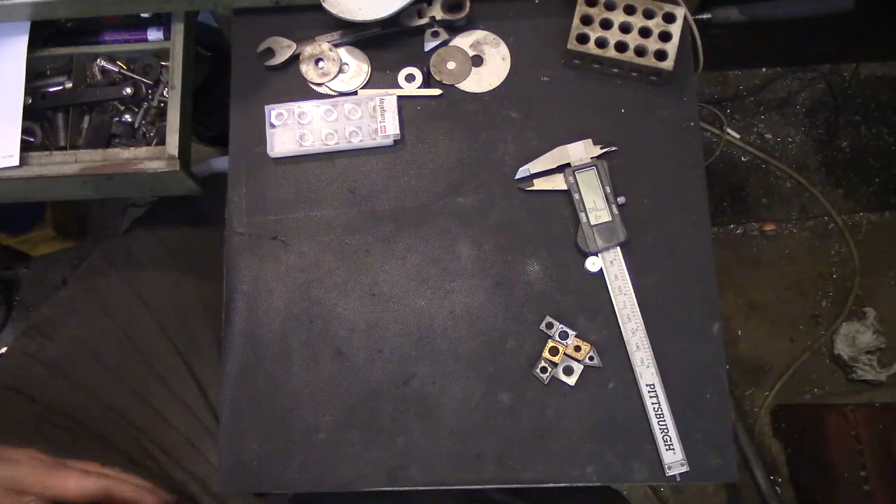And for this little quick episode, well, maybe it is going to be quick, maybe not, I want to talk about carbide insert tooling. Now, there is a big raging debate, or actually probably a lot of confusion. Do I, should I, can I run carbide insert tooling or any insert tooling with my small lathe?

Now, I'm addressing all you small machine owners like myself. Even though it's a larger bench top, it's pretty much a bench top machine. While it's not the smallest of the classes, there are probably a couple of X2 minis that are actually a little smaller than mine. Mine shares many of the same traits, meaning rigidity.

In machining, it's all about rigidity and precision. And you really can't have one without the other, because we're shaping metal, and metal fights back. So you need to have a little mass in the ass to take up the shocks and to force your way into the metal to shape it the way you want it. Anyway, for people with my class and lower of machine, should we use carbide tooling?

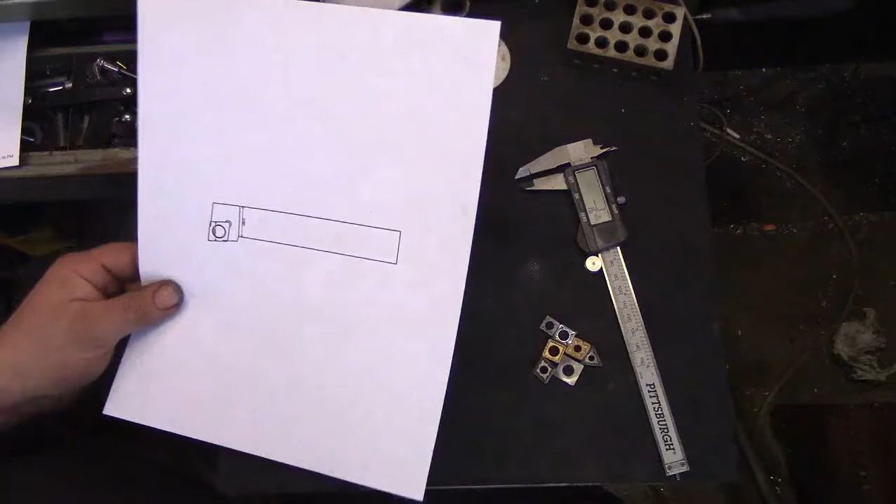So let's look at some of it, because my project today started out to be making a tool holder like this. And that's just setting the stage. We'll get back to that in a second. But let's look a little bit at some carbide. I'm going to zoom in to the desktop there.

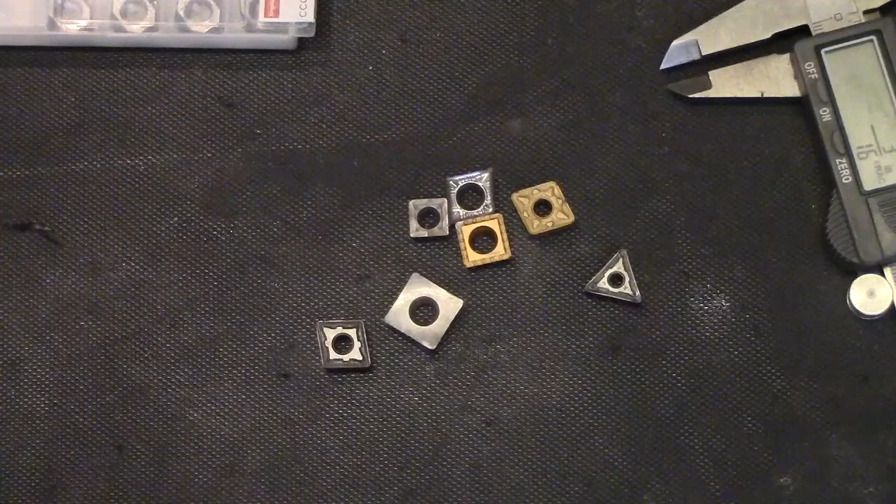Okay, now we're going to look at some pieces of the carbide and what you should look for, because chances are, if you've used carbide tooling before, it was probably given to you by a friend, or you just picked some up at random, not realizing there is a wide difference between them. Now, for a smaller machine, you want what's called a positive rake. Just like your high-speed steel tooling, you're going to want something with a good rake to it, a good attack angle, something that's really going to bite into it.

And this here is an insert particularly well suited for aluminum. This is pretty close to these, which I did buy for aluminum, hence the AL designation there. And you can see this is a single-sided insert. Look on the bottom, there is nada. On the top, you have this wicked rake there. Nice high rise, deep attack rake. Nice smooth surface, because aluminum likes to dig in and grab onto shit. It's like it fights its way out the door. And this is about a 7-degree relief angle on the nose.

So this is a really good tool, and they leave a beautiful finish, and these can be run with most machines, or all machines, because of the high angle, high rake, smooth tool. It takes very little tool pressure for this thing to do its job. And these are just nice to have around, because I do a lot of aluminum work, and they do leave a beautiful finish. And these weren't expensive. I picked these up probably for 30 bucks, I think about that shipped to the door. And that's 10 inserts, and they do work nicely.

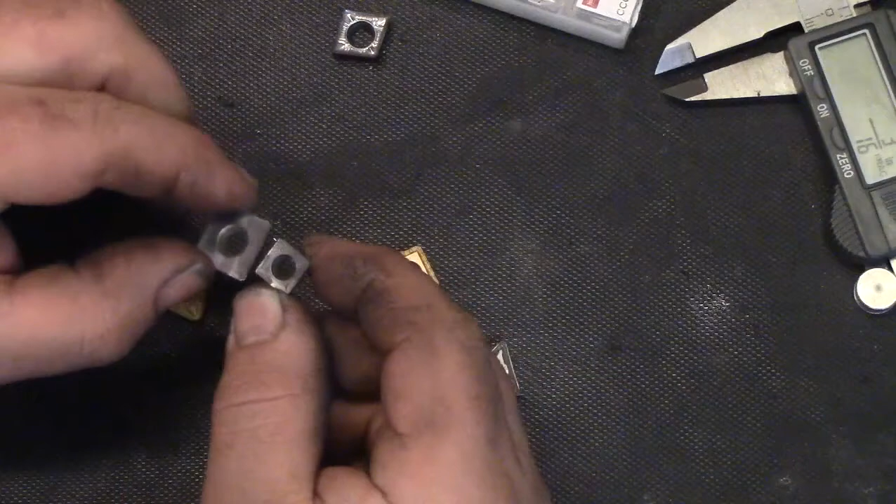This is more or less like that one. This is another single-sided, and that has a positive rake on it with even a flatter dish on the top, but still should cut some mild steel pretty nicely. And this one's probably the least offensive of them.

This is a... I got all these at the junkyard, so I don't even have the numbers on them, but by looking at it, I can see this does have a slight bit of rake on there, probably a 3-degree, and it's got a little bit of positive on the front, and this is all chip breaker here, and this would be good for steel.

These examples here are double-sided, and chances are you probably tried these on your small machine, and that's probably where your issues arise. A double-sided insert is going to have no relief, just because that's the way they're manufactured. So you're going to have a zero relief. Now the only way you can get a relief is by using a tool holder that angles the tool bit down just a little bit.

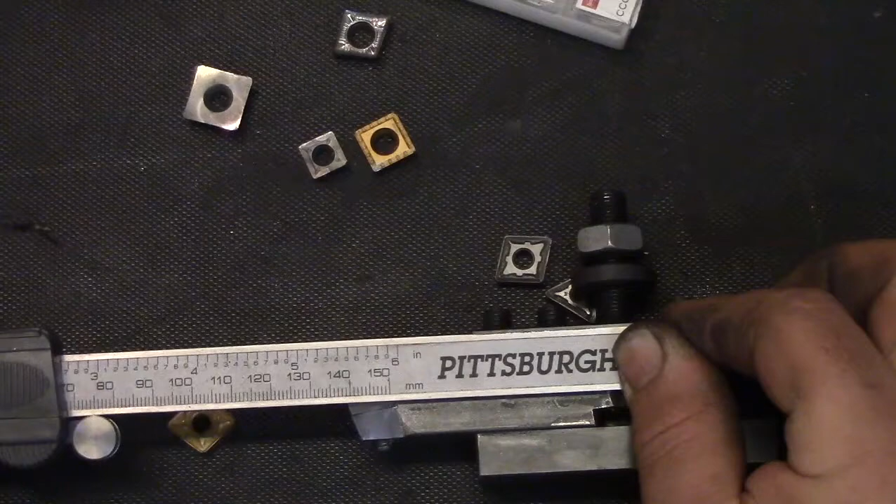I believe I have somewhat of an example, but I do have the wrong tool in there. I have a tool that already has a rake in it, but that's kind of why I'm building the new tool holder. This one I made for these style inserts, and if you can see the line there going across, you can see how the tip angles downward to the cutting edge. And this one's approximately 5 degrees, and that is the only way that a double-sided insert can provide any relief. It's done by the tool holder itself.

Boy, I cranked that sucker on there, didn't I? I'm glad I experimented this way before buying a bunch of this stuff, because it would have worked pretty dismally on my machine. The only use I really found good for is blasting off scale and snot, but it really takes a lot of tool pressure and some grunt on the machine in order to get a good cut on metal with this kind of stuff.

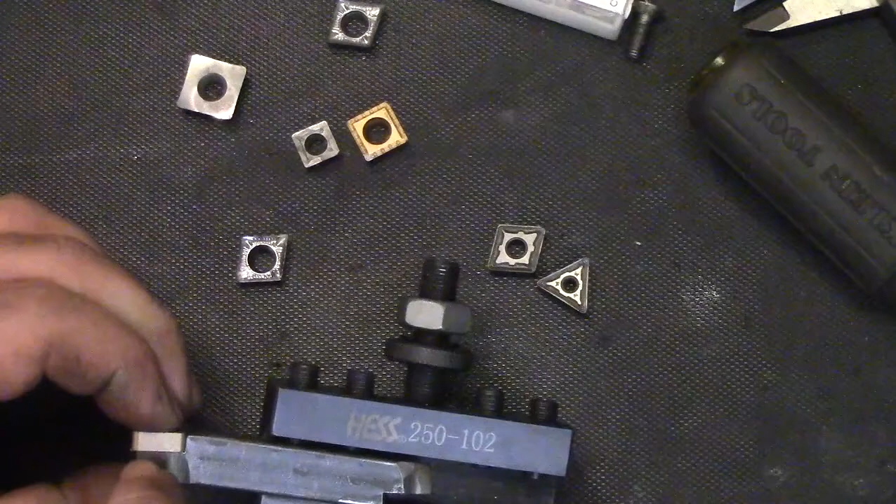Okay, you see there's the flat, the zero angle on these inserts, so it gets that teensy bit of relief by angling the whole insert downward and giving you the clearance at the very nose. Now the problem with that is, once you've angled the bit down, that doesn't leave you a whole lot of room and ability to put rake on the top hand side where you're actually doing the cutting, so it's going to be limited. So if you want to use this kind of stuff on a smaller machine, you're going to want positive rake inserts, single-sided.

And the good rule of thumb is grab one. If it's sharp to your finger, it'll be sharp to the metal. If it's dull to your finger, it's like trying to cut steel with a butter knife. It's just not going to work. So if this is what you played with before, take another look at insert tooling and get something more suitable to your machine. Now, how do you know what is more suitable for you?

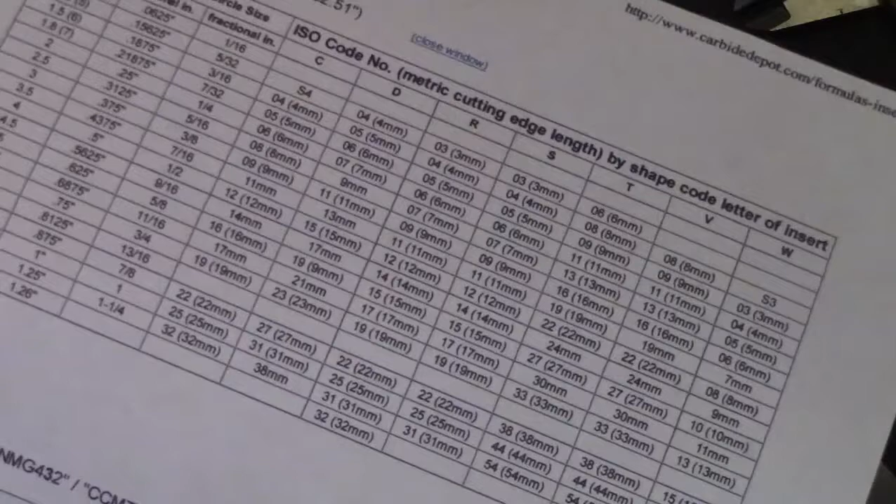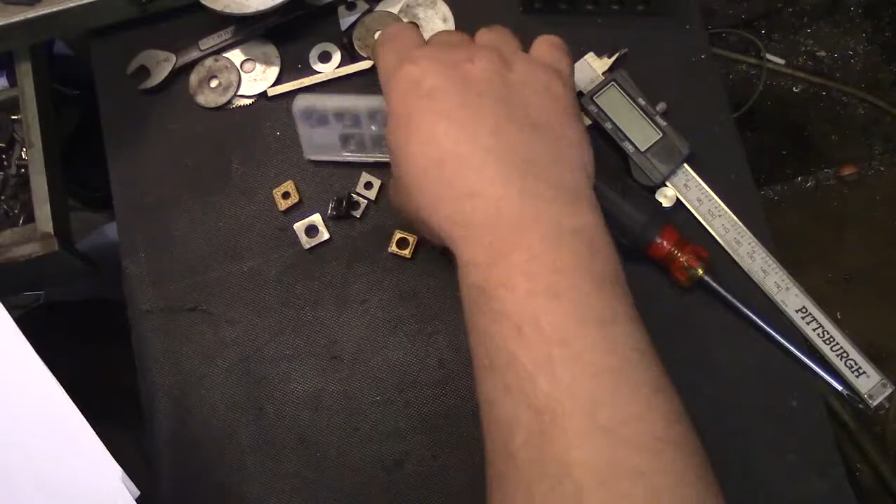Well, I happen to download some of these pages here from a place called Carbide Depot, and they have some nice little reference material on here. And we look at the designations. So I'm going to use this type as an example. These are the CCGTs. Now, along with a lot of other people, I thought the G stood for a ground finish. Well, it just happens to work out that way a lot, but that is actually a fallacy. But let's go down the line.

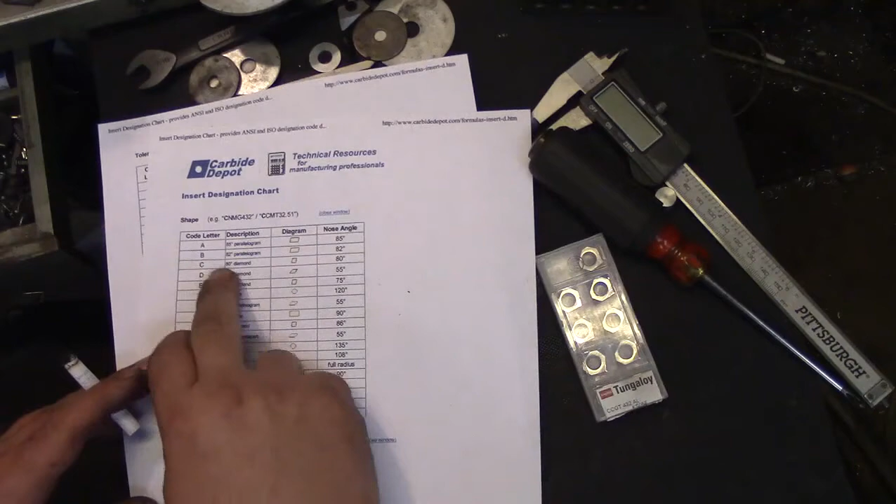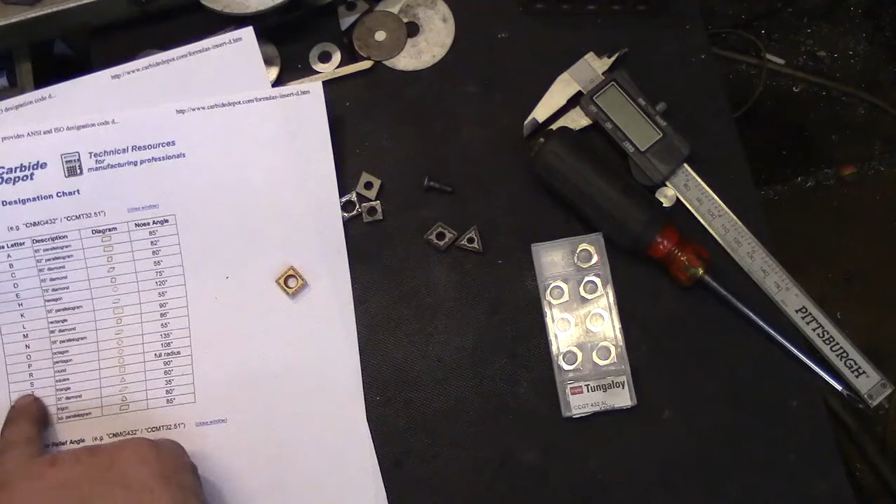First letter designation. Mine's a C. A C is going to be the 80-degree diamond, and that relates to the whole shape of the insert. So this here is a square, so that's going to be an S. That's an S insert. There's no parallelism to it. It's just a square. And I don't know what I'd use that for. I don't have a square tool holder.

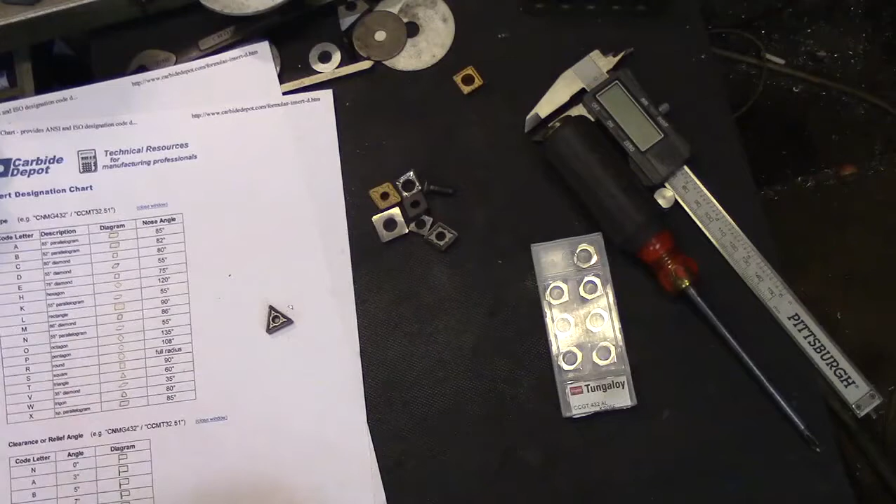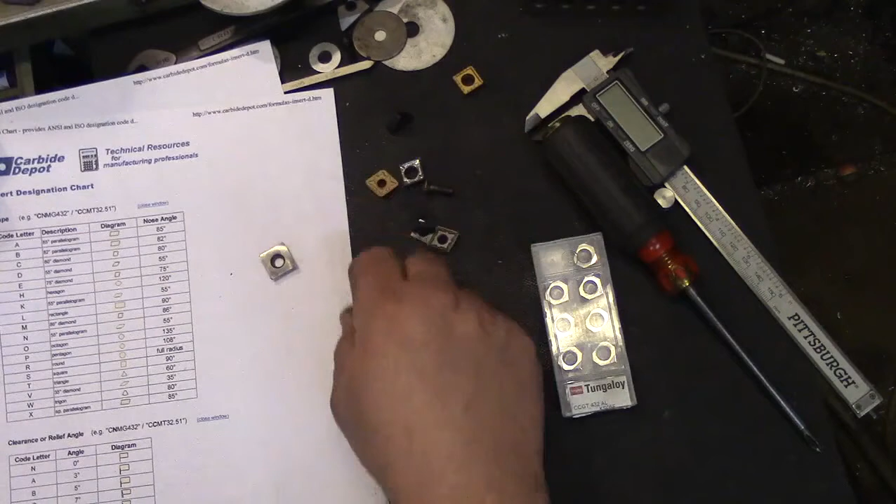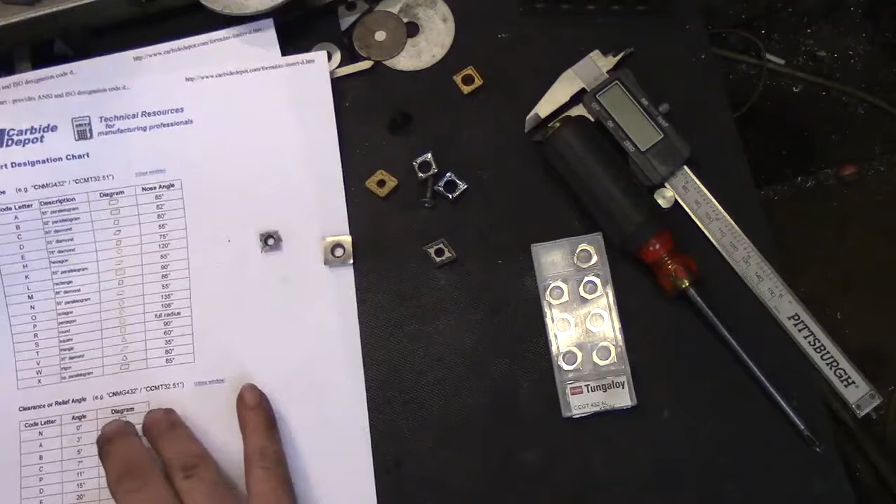You got your triangles. That should be an easy one. That's a T, like a TNMG. It's a very popular insert. And these should be so popular that you can get these in a positive rake. There's another big square. I have some narrow rhombus and stuff. The V is a good choice for like profiling. Get that narrow diamond shape. But anyway, let's move on to the next letter.

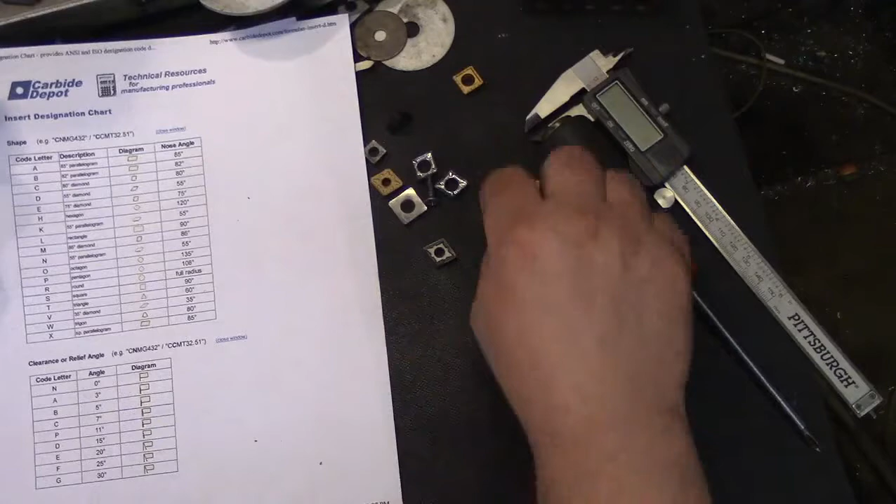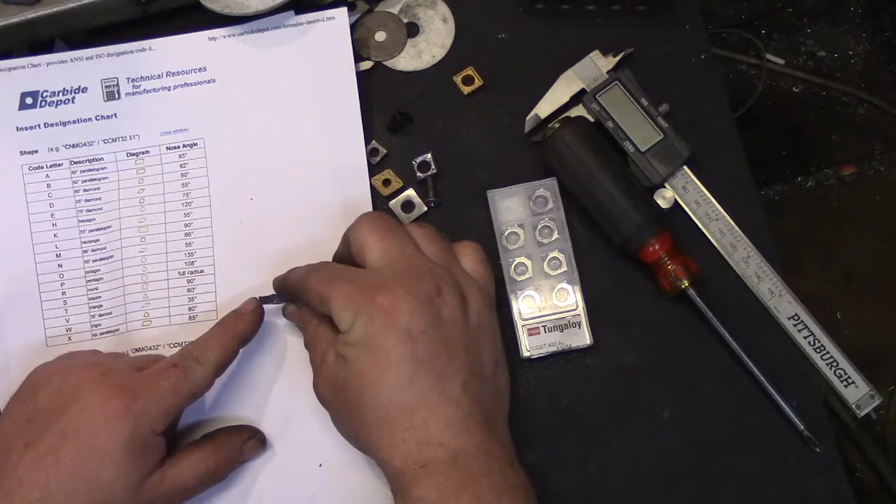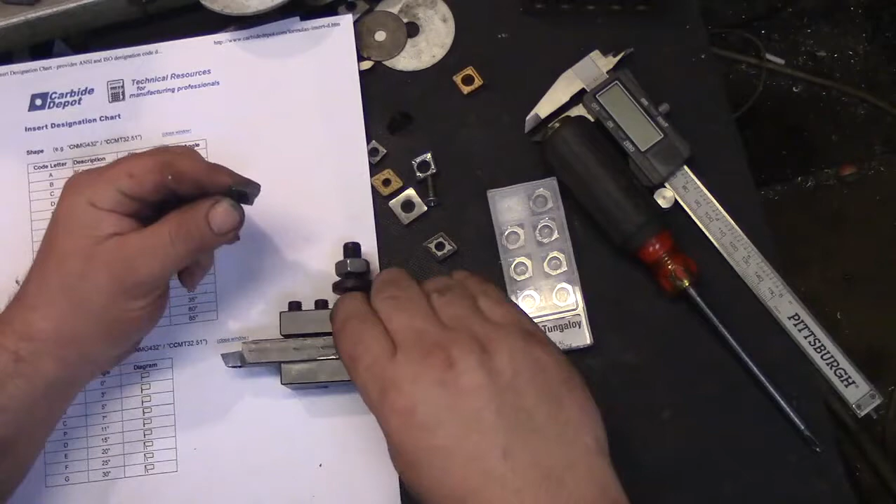So we got the CCGT. Next C is 7 degrees. That is a 7-degree clearance or relief angle, and that is this angle here from the tip downwards to the bottom of the insert. So that is the angle that the tip is being presented to the workpiece. Now if I put it in a 0 degree or an N tool holder like I showed you here, that makes this even more of an angle. So we got 5 degrees plus the 7, so that's 12 degrees.

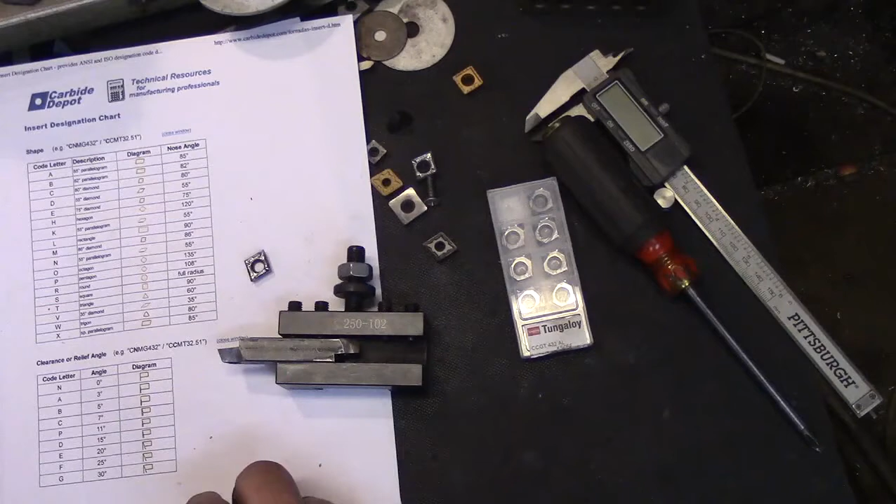But when you do that, you're losing some of the shearing action on the top, so it provides a flatter face to the workpiece and the metal, and it doesn't want to shear off as good as it would if it was at its flat normal angle like this. So it's not really suitable to be used in those tools. It can be used, and you'll probably get more success using this type of bit in this type of holder. But let's just say if you're running a small machine, you want to stay away from these N style holders. And the fun part is, if you're a machinist or tinkering, you should be making your own holders anyway, which is what I'm going to do.

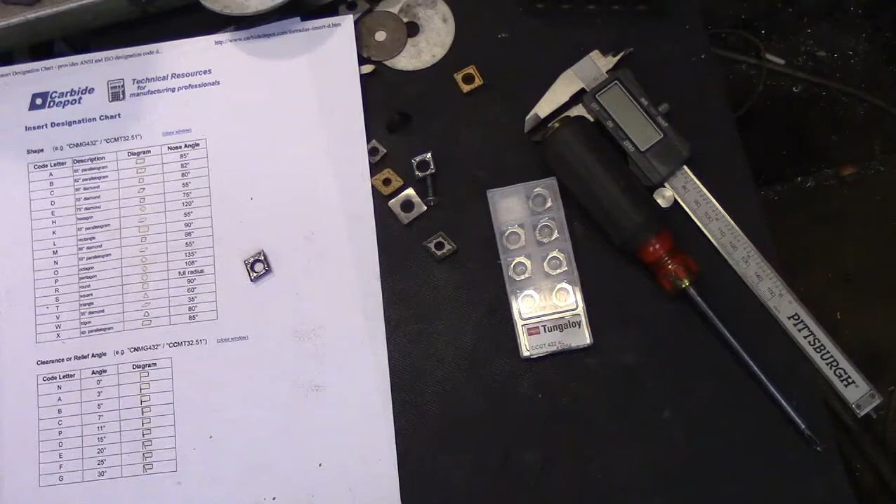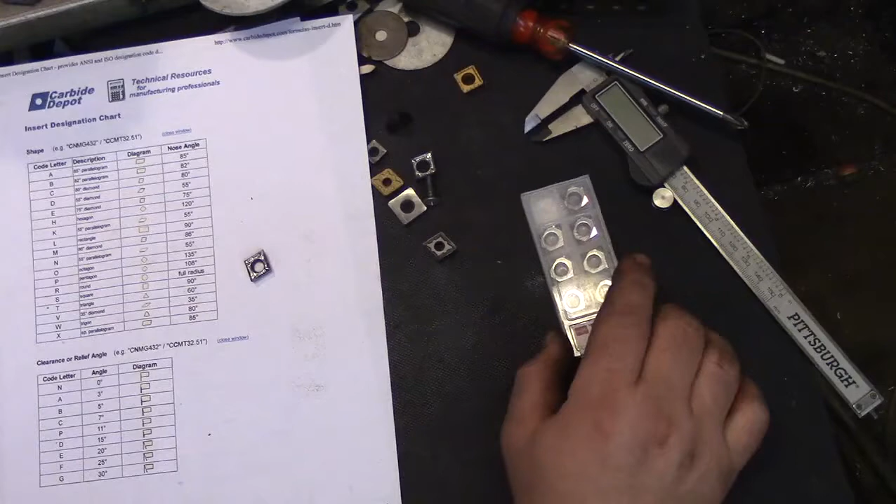And since you don't have to mess with that angle, all you have to do is cut the sides and the hole. You're groovy. So we don't have to worry about that compound 5-degree angle. And that was a pain in the ass. So now I'm getting away from all that. I still like to use high-speed steel, but it's nice to be able to just grab a point and go when you're in the middle of something. Or have something with a predictable nose radius if you're trying to do half-assed CNC like I am.

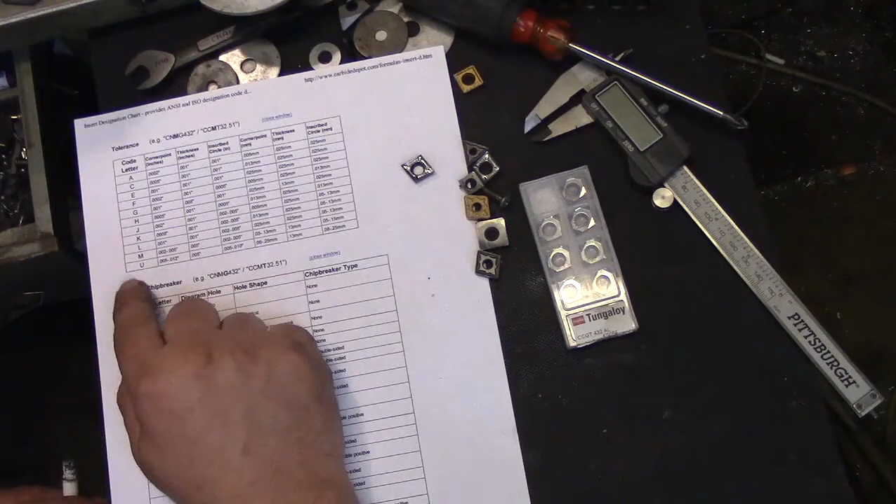Moving on. I know I'm horrible at jumping around. The third letter, shown by that little thing there, mine's a G. Now see, G does not stand for ground. It stands for the tolerance. And the most popular, which is an M, you can see according to this chart, is next to the last of the sloppiest tolerance tools. And that's how they keep the cost down.

People use these inserts because, especially on manual machines, it doesn't matter. Once it's loaded in the tool, you're touching off and doing all that stuff anyway. This would more come into play when you're running CNC, and you drop that tool in your holder, and you want your tool table to be correct.

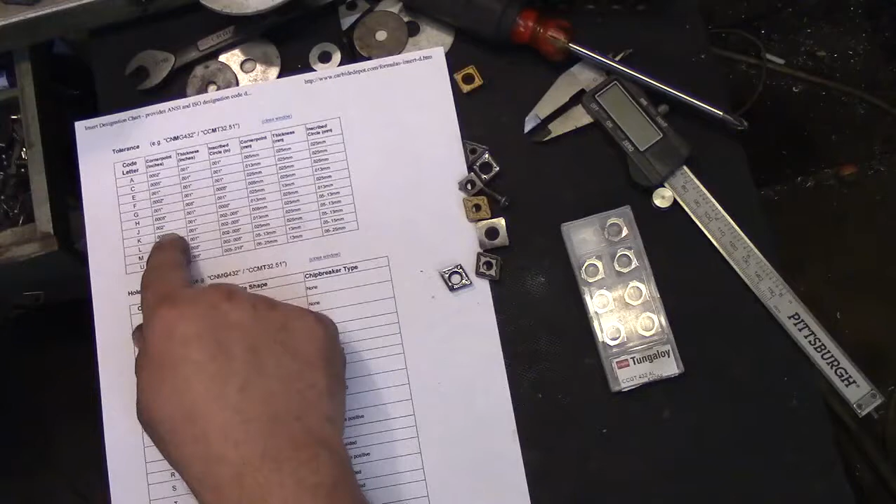But no, it doesn't stand for ground. It stands for the tolerance of the overall shape as far as the radius, the height, the width, and blah blah blah. So any of these will work for you. That's not a deal breaker when you're picking out your stuff.

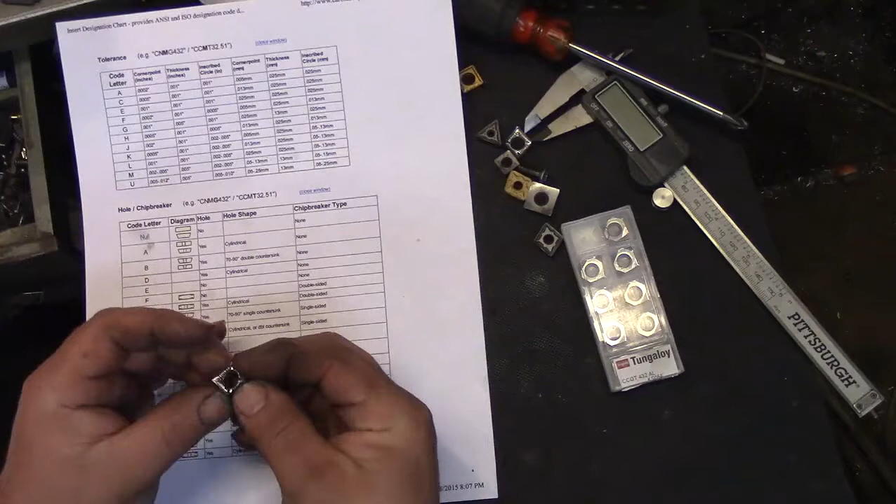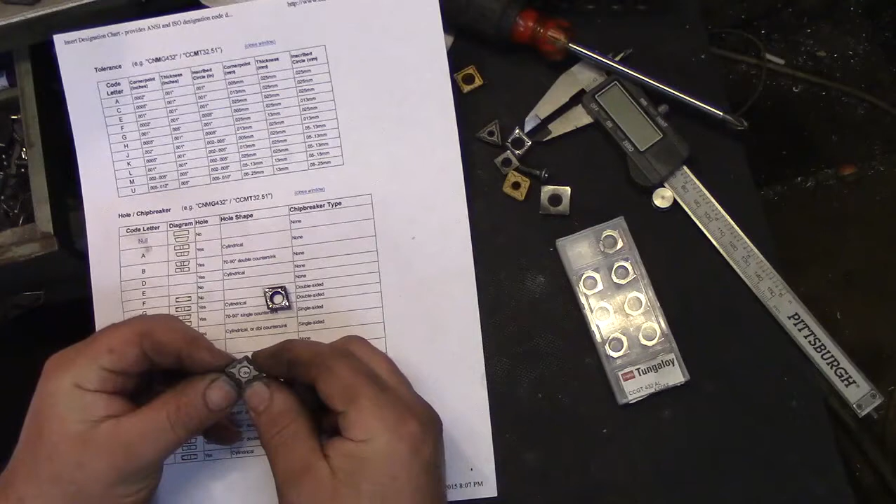And the fourth letter is the hole chip breaker combination. Now mine is a T, and that tells me right there it's a single-sided, a double countersink, and that just stands for the type of screw profile it has in here to tighten it down. Some of these, like this one, see, it's got a single countersink and it's a straight hole. Pretty much use a pan head on that. But it would take a certain type and size of screw to hold that snug.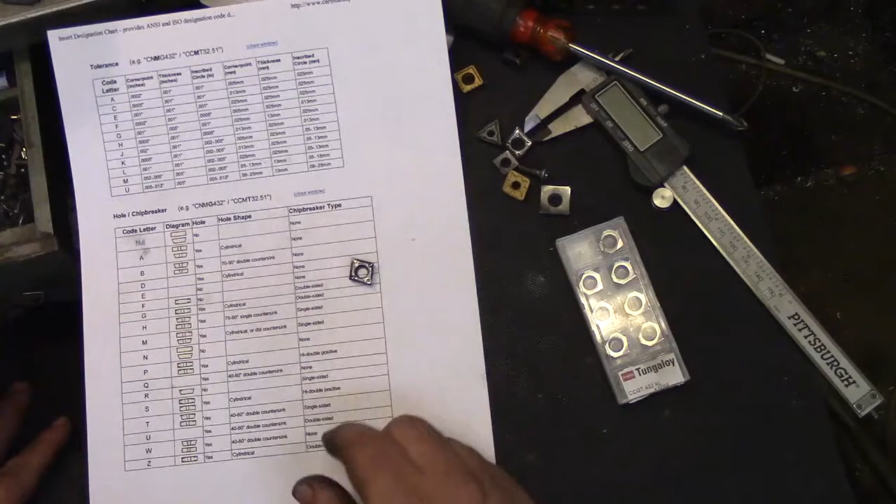This would be probably an F, maybe. Oh, excuse me, not an F. No. Could be a P. But either way, this has a slight chip breaker in here, but it's still very dull to the finger. So it's not something I would use on a small machine. Either way, that's pretty much your letters.

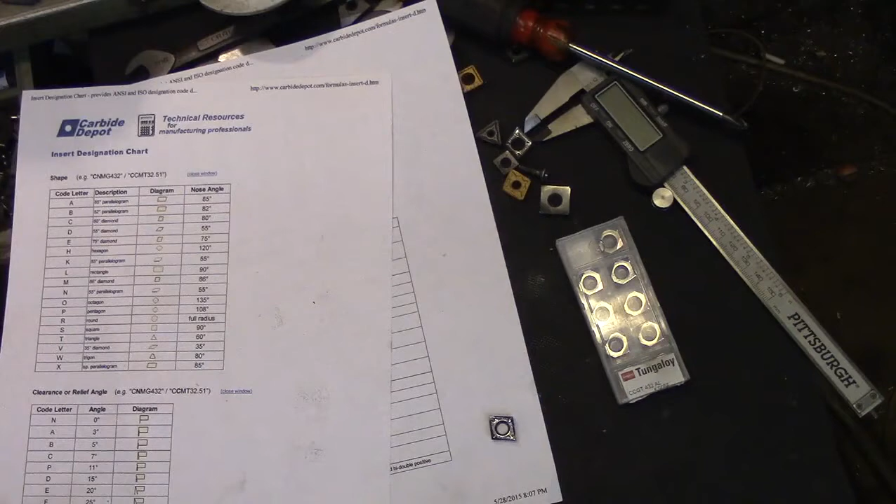Grab these sheets. Go to Carbide Depot, look in the reference section, and grab this stuff because it's going to be a big help to you when you go on eBay looking for some inserts to try out. You'll have an educated guess of what you're getting and what it means. Or if you find a wonderful sale that looks too good to be true, and you look up the numbers and you find out they're totally unsuitable for your machine, that's going to be it.

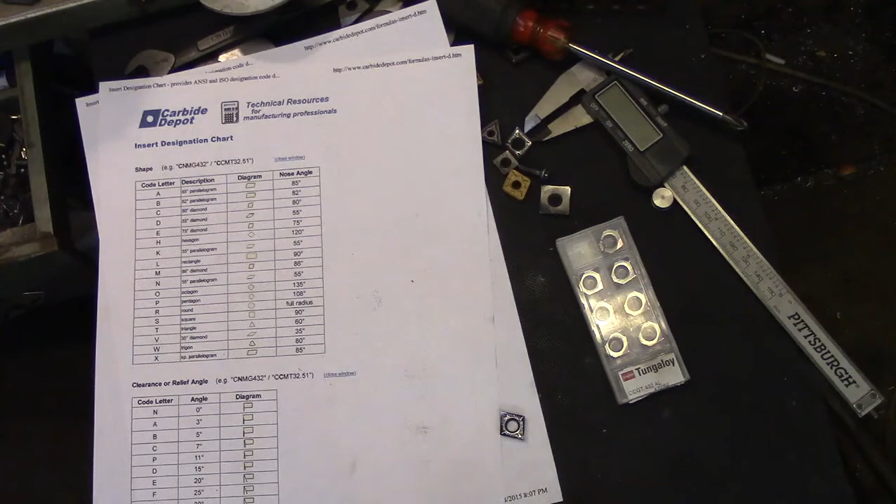So size and shapes, not a big deal. The big thing is your clearance and relief angles. You don't want to do the N's. Stay away from N. If you have a slightly bigger machine, you can use probably A and all the way down. For the smaller guys, you probably want to stay with the C's and up, because that higher relief angle means higher pressure at the very cutting point of the bit.

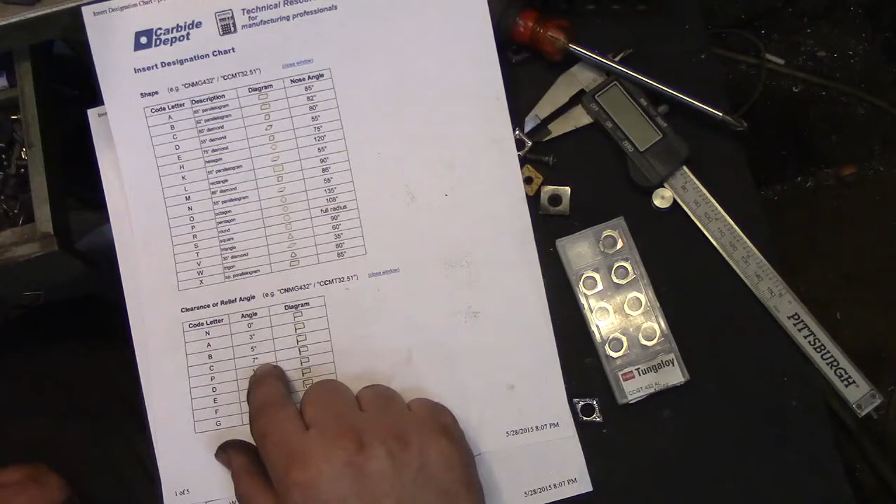So the higher that clearance angle, the more power to a point, so to speak, and you can really dig in and cut some metal. And for aluminum, look at that, that's some high rake stuff there. A lot of this, you ain't going to see these letters until you probably hit mill tools and such, except mine's a 7 degree and it works just fine on aluminum. For steel and such, I'd probably use 3 and 5.

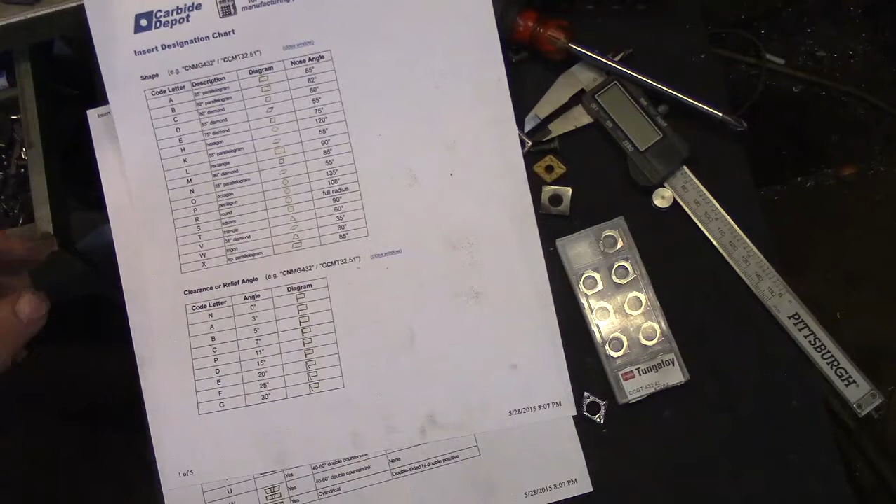The N would be just like using a, well, actually it wouldn't be like using anything. Stay away from N. Small machines, stay away from N. That's all I'm going to do. Now I realize I'm making a sweeping generalization or a blanket statement to avoid the negative rake tooling for small machines.

But that's because they really don't have the horsepower or the rigidity to function the way they are intended to do. That type of tooling not only cuts, but it also forms the metal, and it does this by using a high tool pressure and a high speed to run the metal against that blunt edge of the tip. And as it's doing that, the metal is being heated up, it's being deformed to the point of fracturing, and then it breaks or cuts off, and then the smooth edge of the tool kind of burnishes it back into place, and you get a smooth finish.

And it's almost a different cutting action as you would get with like an aluminum bit or a standard high rake bit on a smaller machine. So since your machine really can't do that kind of cutting action the way it's intended, that's why you kind of just want to avoid that altogether, and that's why I said that.

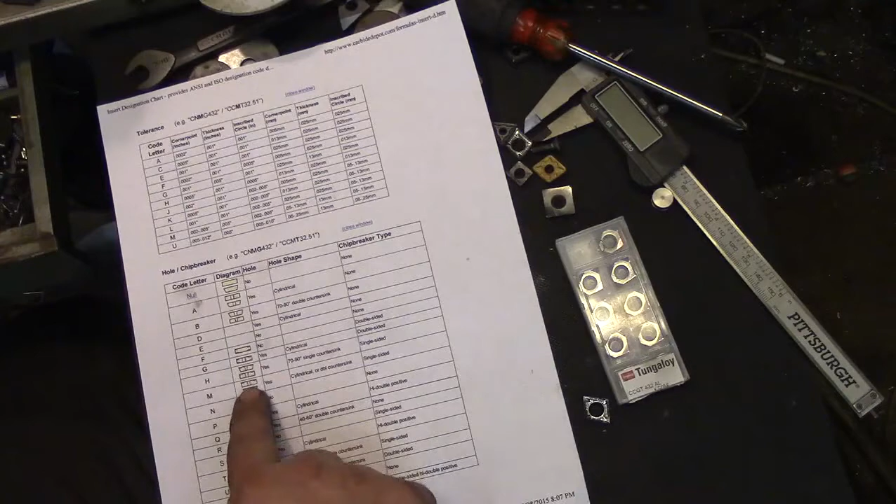Blah blah blah, and this has to do with what type of screw style it's going to be. So if you happen to get a holder for the tool, you got to make sure that your hole size takes the right kind of screw that's going to hold down your tip. But if you're making your own, you're probably winging it just like I am. In fact, this is just a little stainless steel screw that I got out of the crap pack from the hardware store, and I just turned it down to give me a decent profile to fit into my particular aluminum style inserts.

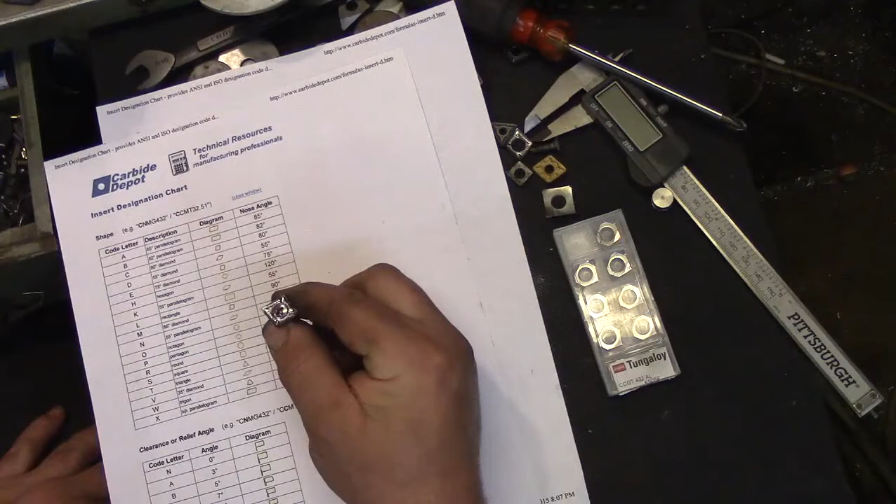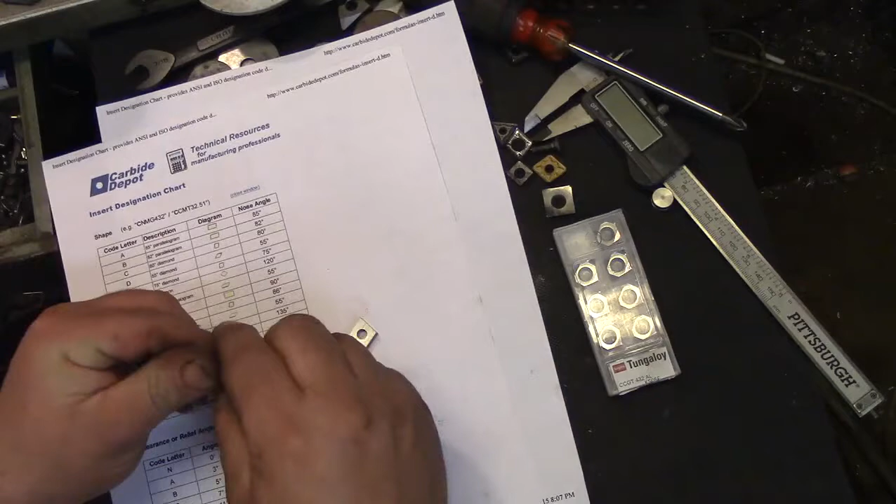See, nothing wrong with that. It won't get in the way of the chips, and it's got enough threads and meat there to give it a good grab. So that's what I'm going to be using. So hole size really doesn't matter. This just happens to be what I grabbed, and since I'm making a tool holder, I will make a screw to fit. But grab these references. They're very handy.

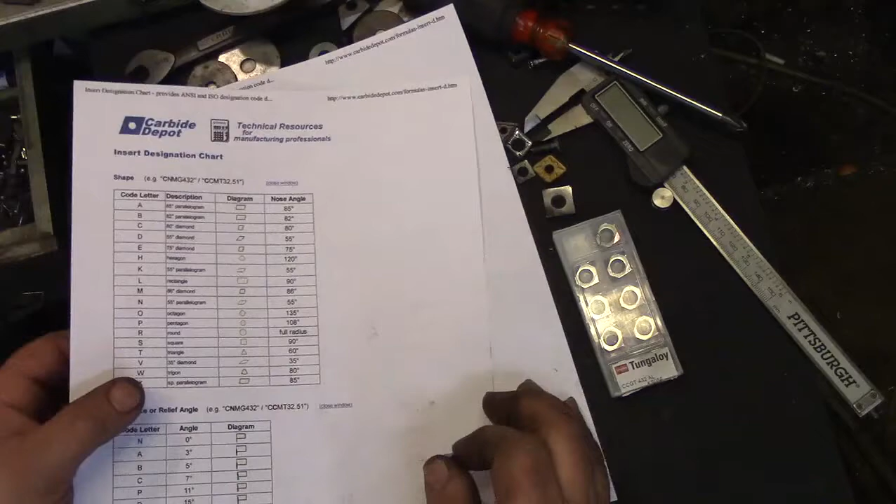Back to my tool holder. That was just a bunch of aside stuff. This is what I'm going to try to make. I'm going to make it if it kills somebody. This is what's known as an SCLCR. What the hell does that mean? Well, you can get another chart.

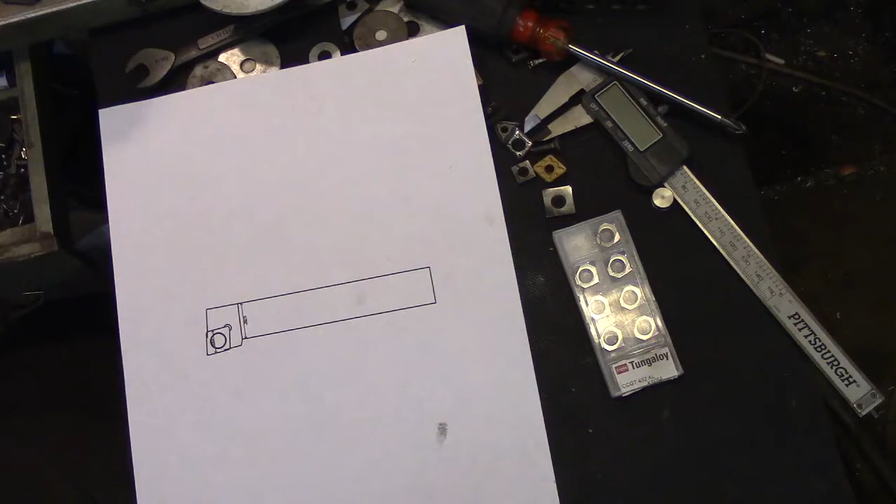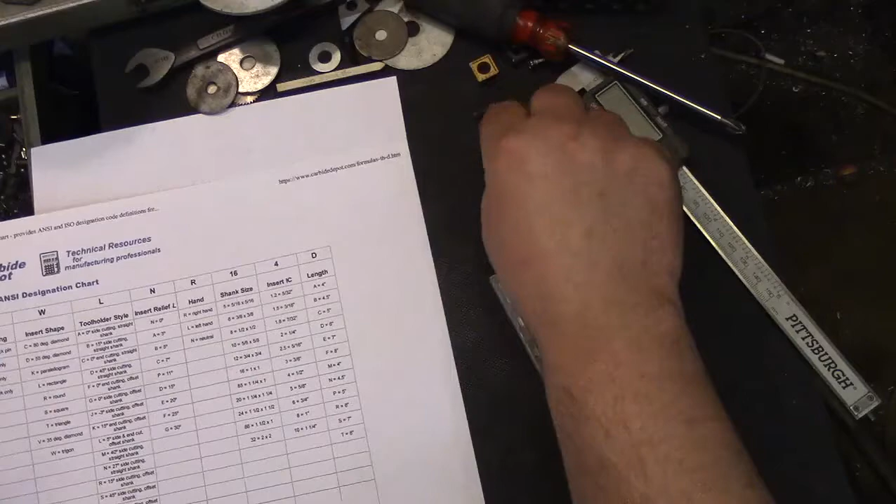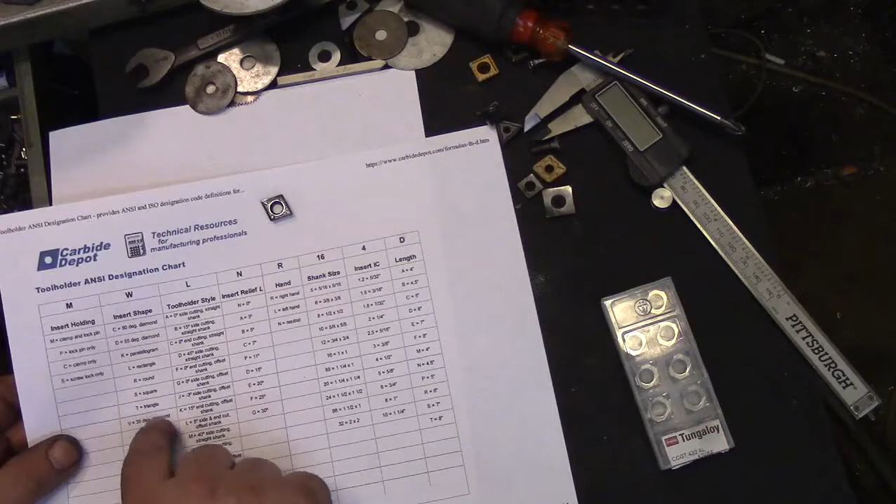This is for this particular shape, which is an 80-degree diamond right here, which is very popular. And the S stands for screw lock, which means it takes a screw to hold it down. It's not the clamp style. It's not a pin style. It's not the pin and clamp style. It's a screw. See? Screw. The insert shape, that's the important one there. Not square. It's going to be a C, 80-degree diamond. As you can see, that is going to fit in there just like that.

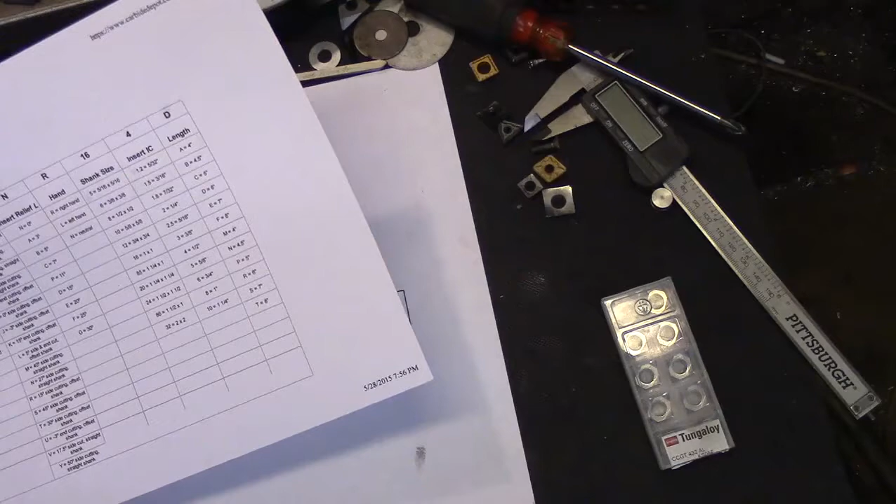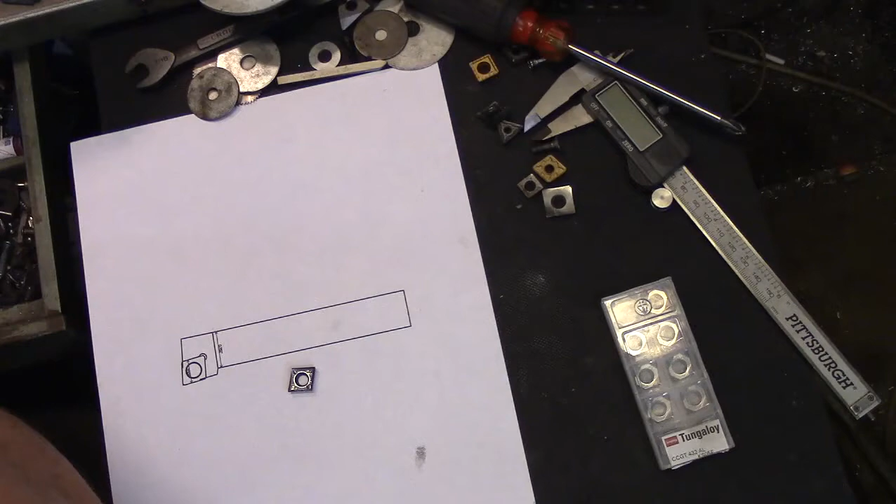The L is a tool holder style. My L is 5-degree side and end cut offset shank. And what is that? That is this little bit of angle right here. So if this line here, if we call that a 0, and if we write it in with a pen, which I don't have because I took it in the house, but we'll just count that as our 0 degree line there. Well, this piece here is going to be 5 degrees different, so that'll be 5 degrees going this direction.

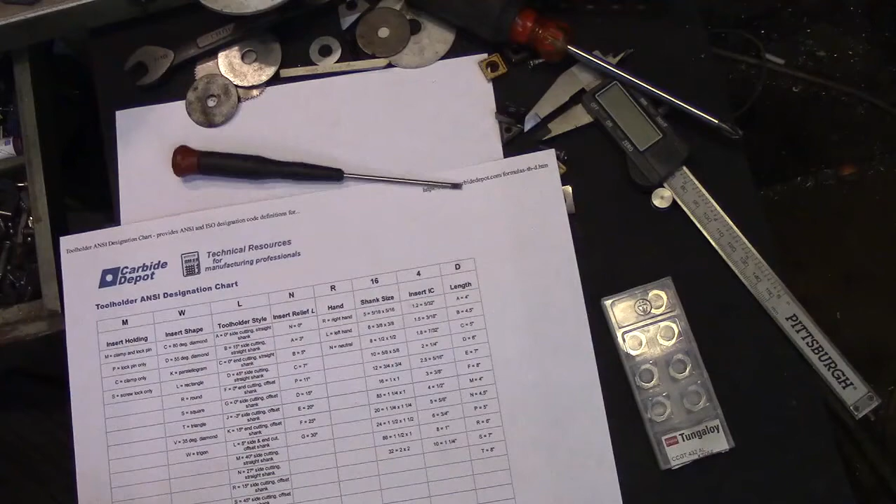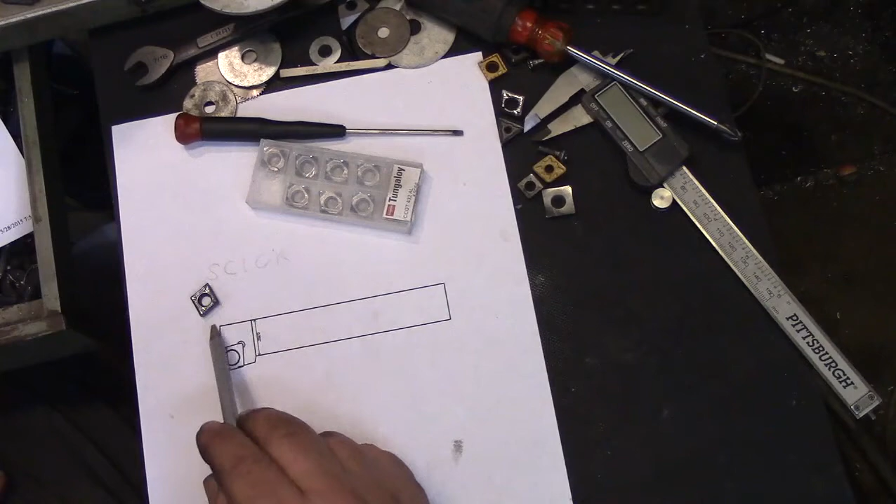I'm just going to have to use one of these. This is SCLCR. S is for screw lock. That has a hole, so that's going to be locked down with a screw. The insert shape, C, which stands for the 80-degree diamond, which is what that is. That means there's an included angle of 80 degrees on that point. And on this particular point, I believe it's 100 degrees. So you work out 80, 100, 80, 100, you get 360.

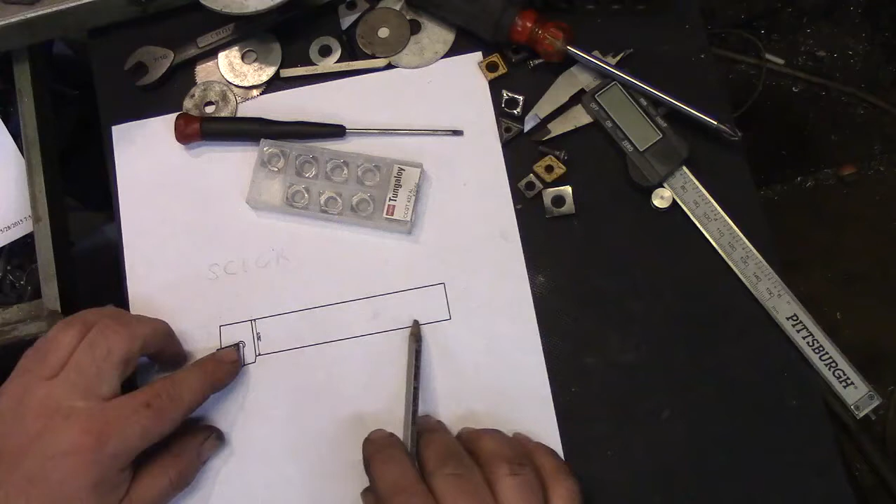And these are nice because unlike a square tool, if you use this particular style of tool holder and you have your tool holder locked like this facing your workpiece, you can both face and turn without having to change the orientation of the tool. That's what makes it popular. So this is a good all-purpose must-have style of tool for anybody with a lathe.

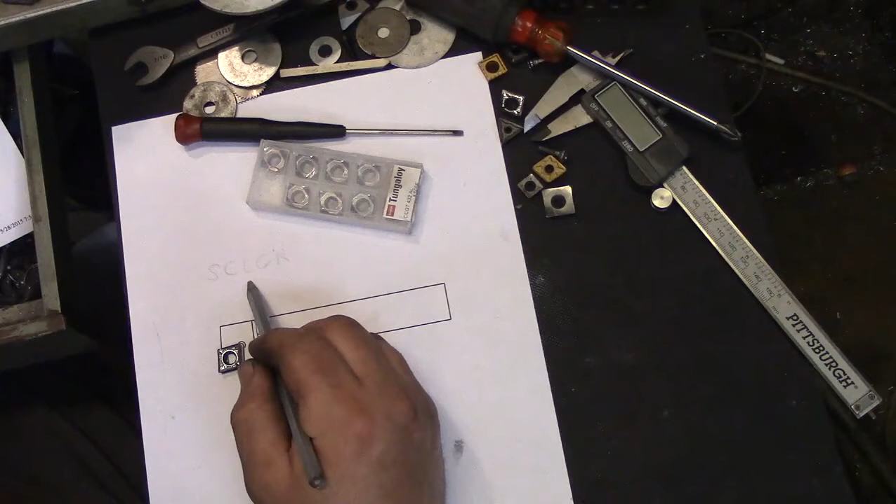The L, which is the tool holder style, this particular one has a 5-degree offset. So it's going to be 5 degrees off. This direction here is going to be 5 degrees off from that. And here it's going to be 5 degrees off from here.

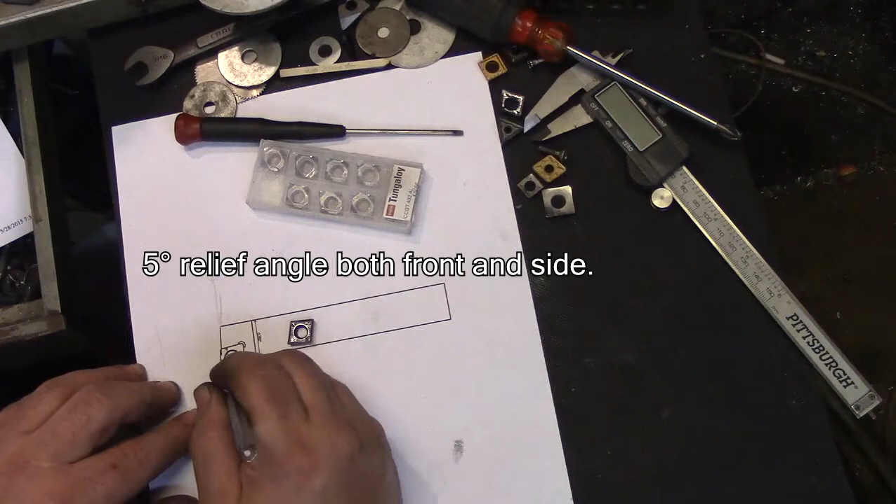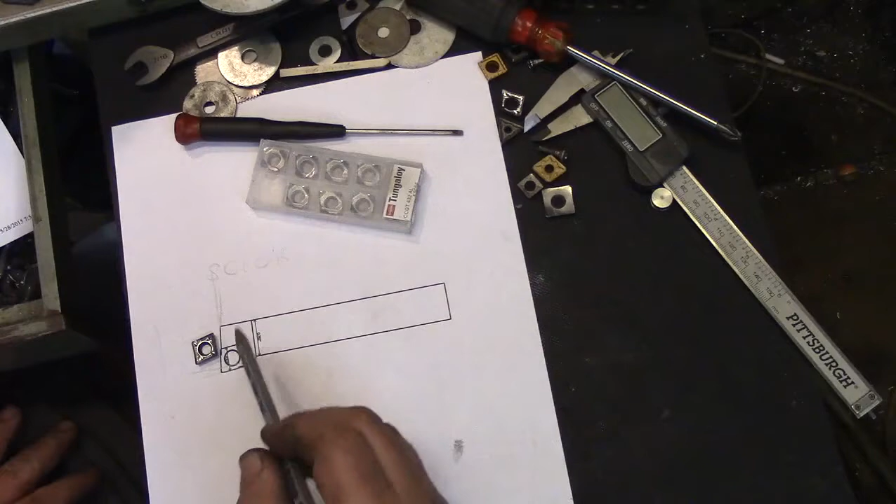Five degree difference lines up with the cutting points on this, because you want it balanced to where you have relief in both directions, either facing or turning. The other 5 degrees comes because we have 80 degrees, and 90 degrees is our straight corner. So dealing with 80, we have 10 degrees left over, 5 used on one side and 5 on the other, so your pocket is also going to be 5 degrees off, except in the other way.

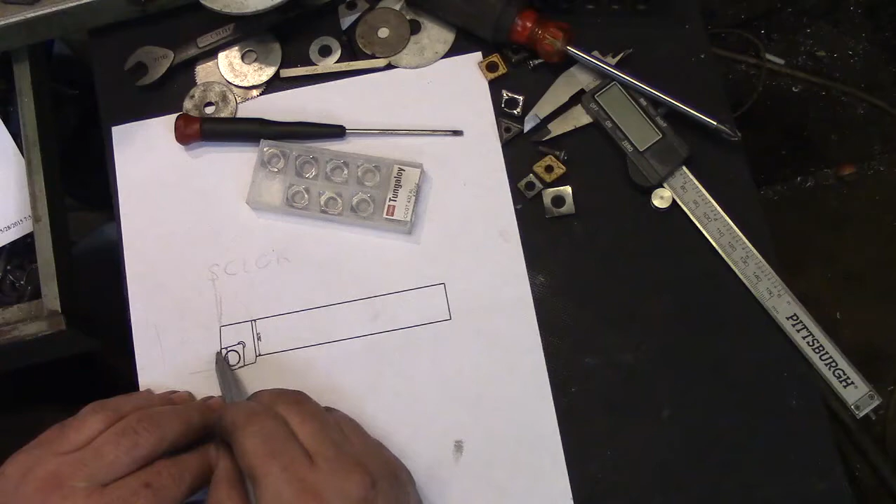So from my 0 point on the machine, when I start milling it, I'm just going to have this set as my 90 and this as my 0, and go 5 degrees off of those edges to give me the shape of my pocket. Then for the depth, I'll just run it in there and clean it up afterwards.

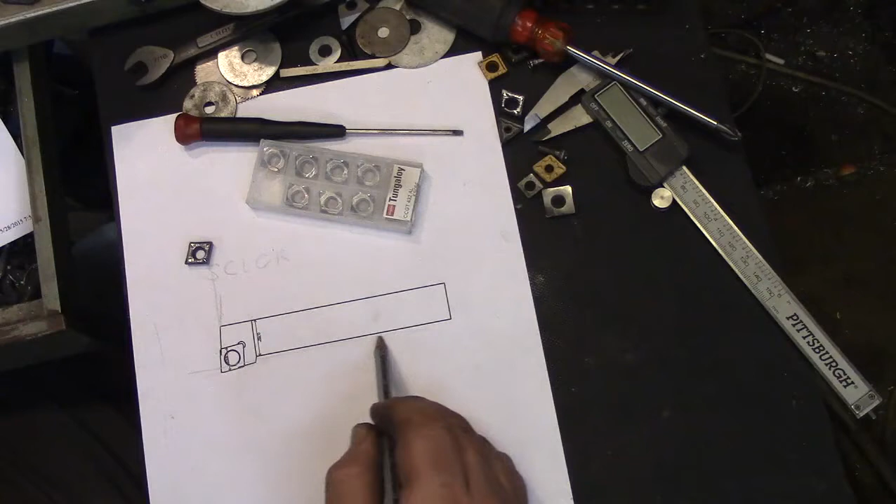I'm going to start with the very hardest part for me, which is the pocket itself. Once I have that established and I'm comfortable with it, I'll go ahead and cut the bar and machine this. I'll take away some metal here so I have more relief room, and do the reliefs on the sides. Since this is a positive rake tool, single-sided, I don't have to do a compound angle on the pad.

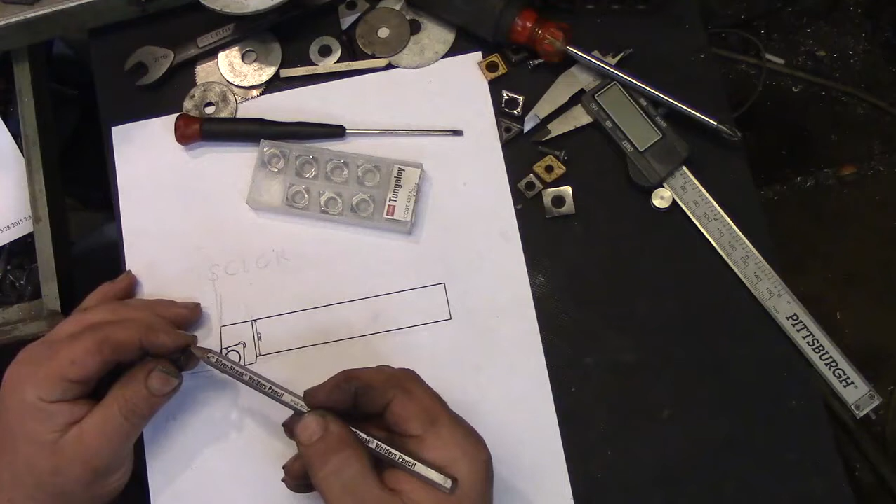Now I'm going to tell you, I am going to cheat, because this is a positive rake insert. The sidewalls are not 90 degrees, so when it sits in the tool, it's only going to contact a very small portion or be loose. If you have the pocket real deep, you have a chance of breaking off the edges or the tips.

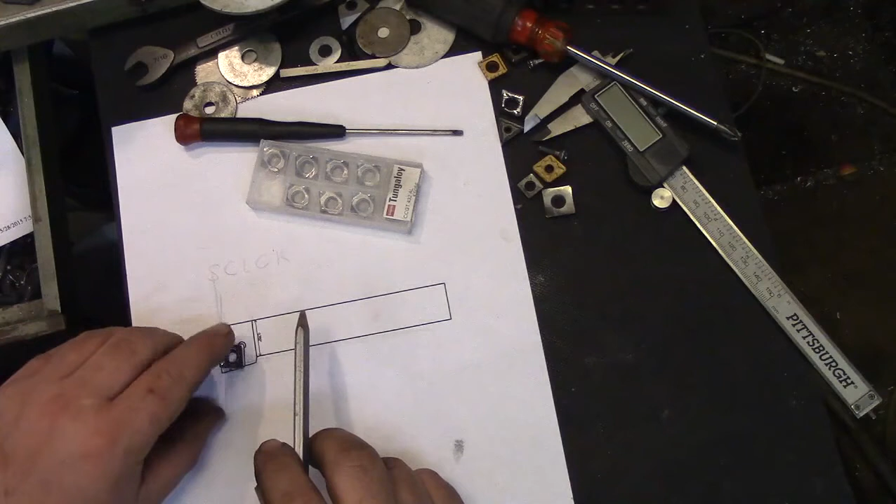So my plan is to machine it just a little bit on the sloppy side as far as wall spacing, and then I'm going to pack that in with JB Weld, and probably saran wrap, or I'll coat this with some release agent. I'll put that right in there and let it sit in that pocket screwed down and let the glue form around it. Then I'll have good overall pressure holding on this particular bit.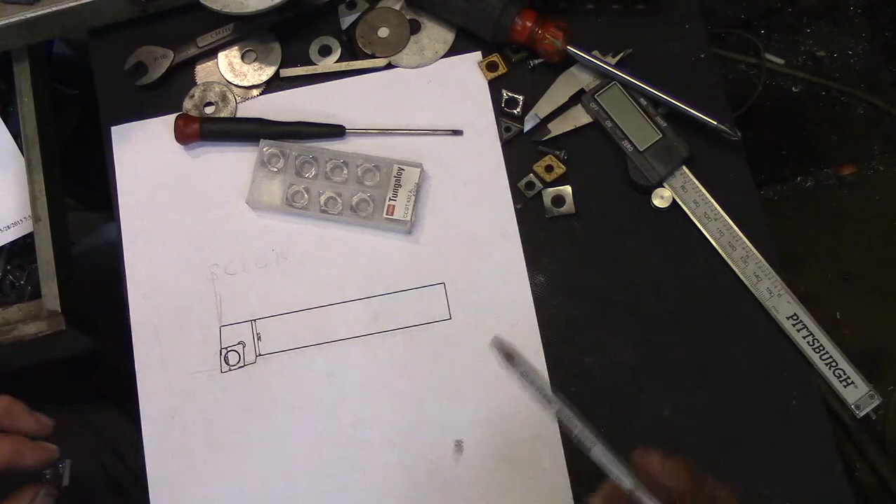See the plan? I know I explained it bad. I'm really horrible, it comes with dementia. I'm getting old, it's setting in, I can't think straight anymore. So I'm doing this while I still can.

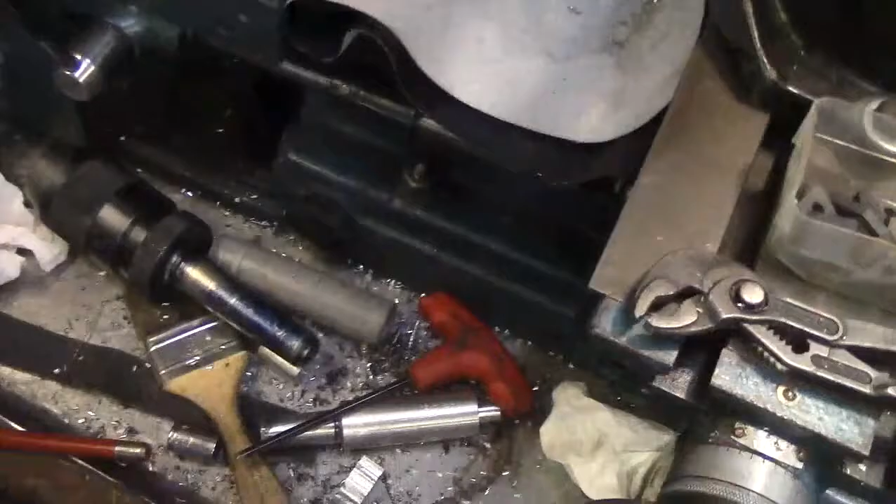That's the plan, I'm going to start making this tool. And how am I going to do that? I will show you. Because if I can do it, anybody can. If Eddie the Grouch can make something, there is no excuse for you all not doing it too.

So what I have here is the crappy rotary table, which I'm trying to get some use out of. I got my vise on top of that, since all I have are T-nuts for this unit that are only 1/4 inch, and I didn't think I could get a good grip on a bar trying to clamp it down with 1/4 inch all-thread. So I have just enough room to stack the vise on top of that, and the bar is in the vise. I think I've got it held down good enough to mill with.

This is just hanging out because I said I'm not cutting the bar until I've actually got this part done, because if I screw up this pocket, I can lop that off and start again rather than having an extra 4 inches that I'm screwed with.

See what I mean? So I've already dialed this in to be true with the movement of the axis on the table. So now I'm going to count that as my 0 or 90, either way, I'm good to go. I'm going to pick out a suitable... actually I can reset this bar here because I don't want overhang, I'd like to have a good hold on that.

There. My first operation is I'm going to take this nose of metal down. Now this is a 1/2 inch thick piece of steel here, and I'm using an AXA tool holder, maximum 1/2 inch. Since it already has to sit high up on my compound, any tool at the 1/2 inch mark will not line up to center of my work on the lathe.